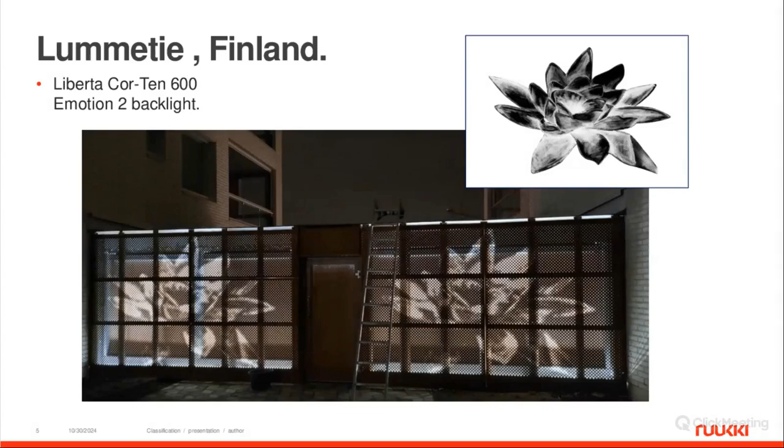This is an introduction of what types of perforation we use. The first, full perforation, means that we get already perforated material to our machines, and we can in general produce whatever product from it, but mostly it's used for design profiles. The material is perforated, so also all flanges and what you later have in joints, everything is perforated.

Then we have symmetrical perforation, and the idea is that you can choose whatever density pattern you want. No need for any drawings. You just need to indicate the size of hole, distance between holes, and what should be free edges. This type of perforation is produced on our production line during punching out the cassette blank shape from raw material.

And the last one, the most interesting one, for me at least, is art perforation, where we can take whatever image and create cladding from it. It can be not very big, 3 meters high, but it can be 30 meters high. The bigger the area is, the better the result.

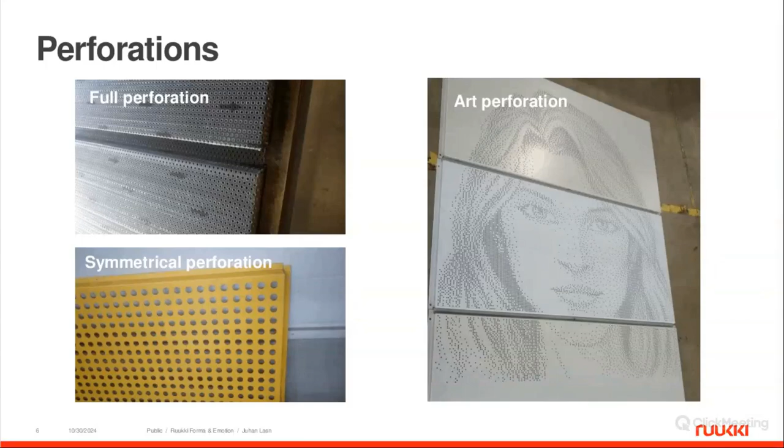Starting from full perforation, as said, it's used mostly for design profiles where we have 0.6 or 0.5 millimeter material, possible for all materials actually. We also do copper, stainless steel, zinc, etc. But the main idea is that this material is already perforated when it arrives at our factory, and perforation is done from coil to coil.

There is a table in the middle indicating which perforation patterns we are able to produce, but we also have a list of sub-suppliers that can make other density perforation with different size, shape, or position of holes, arrangement, either square or triangle arranged.

It's often asked: can you make very dense perforation? This question is usually related to projects where it's necessary to have airflow through the wall, like parking houses. We have tested that if we perforate material with 40% perforation, then make Ruukki design profile Rome S34 from it, we actually shrink the raw sheet some 25%. And as a result, when produced this way, we have 50% of airflow through this cladding product.

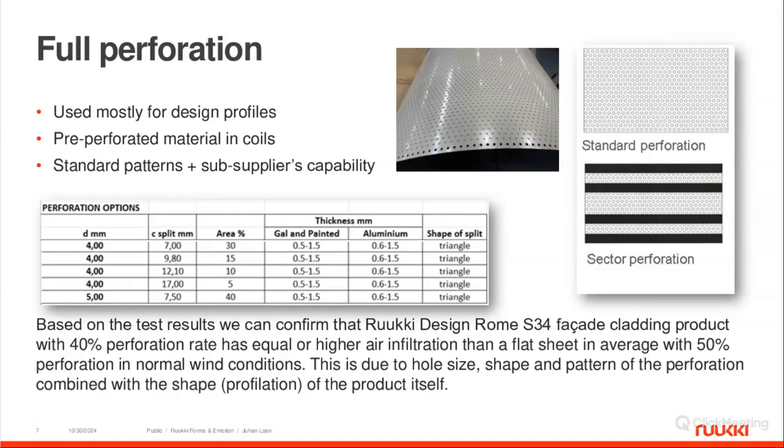Now, this is about symmetrical perforation. The table below shows that we need 30% free area, and on the second row we have different diameters. From this it becomes clearly visible how many holes we will have per square meter. With 50 millimeters we have 152, and with 6 millimeters we have more than 10,000.

And considering that every hole has some cost, it explains why production of high-density perforation is much more expensive than low density. Also, when perforation becomes very dense, the number of holes per square meter causes the material to warp. It's not straight anymore. During punching, it may get stuck in the machine. We have about 10 years of experience with it, so we can suggest: do not do this, but instead use another solution.

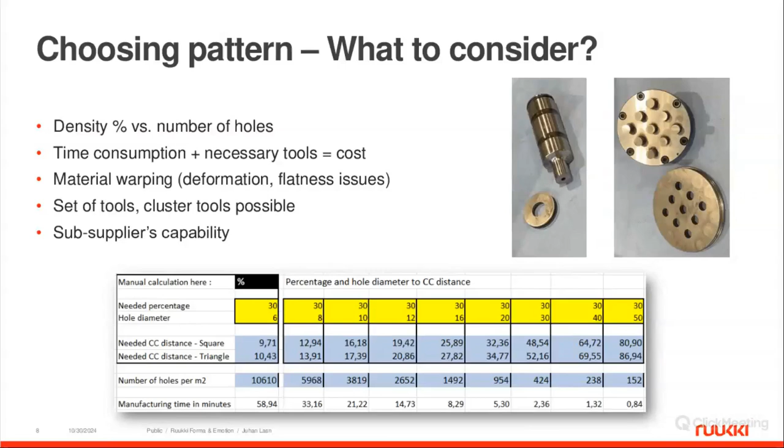Also related to this is that... this, I went too far.

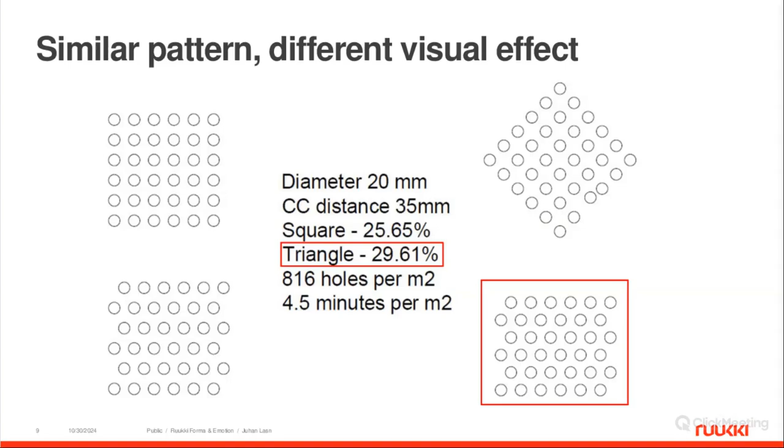We can achieve a different visual effect just by using the same pattern in a slightly modified way. On top left is what we call a square pattern. On top right it is rotated 45 degrees, and we have a different visual effect. On bottom left is a pattern we call shifted. Distance between rows and holes in rows are still the same, so cost is the same, but the visual effect is again different. On bottom right you see a triangle pattern; the density is a little higher, but the distance from each hole to each hole is exactly the same. It's shrunk a little from the original pattern.

What effect these different patterns cause is that if you rotate either the pattern on the panel or the panel behind the pattern, for example we want to install cassettes diagonally on cladding, you see that there is some loss of information. I'll turn my mouse to show you something. You see that here we only lose one row of holes.

We see it in the design phase, but if the architect cannot recognize it from the very beginning, it may look interesting to rotate this pattern, but what actually happens is we're going to lose more and more information as we rotate. There are some ways to make the situation better, but one must understand that it affects the final result.

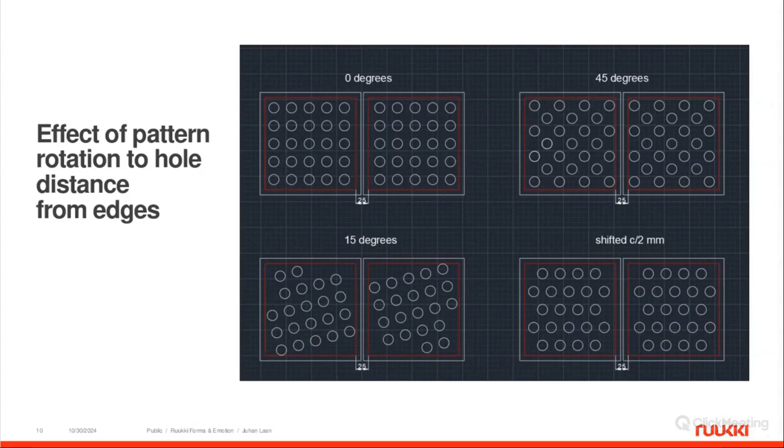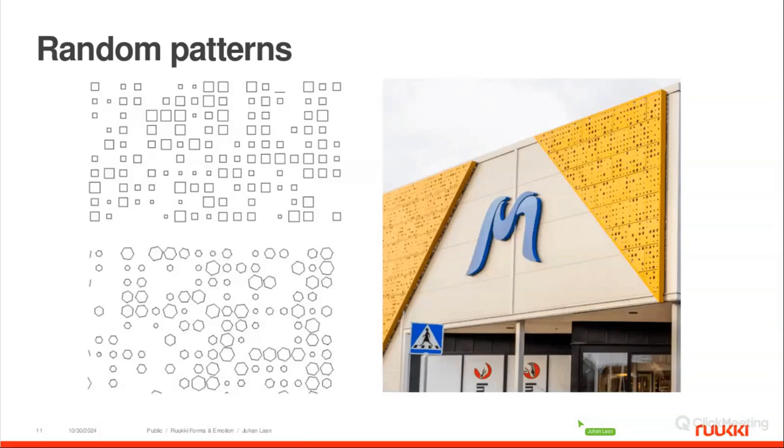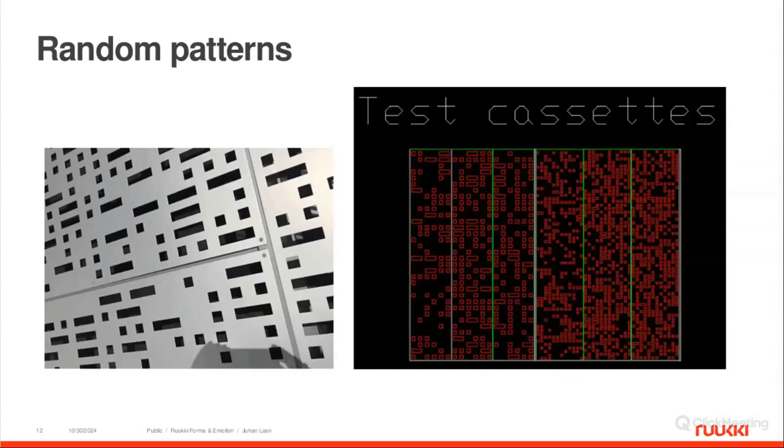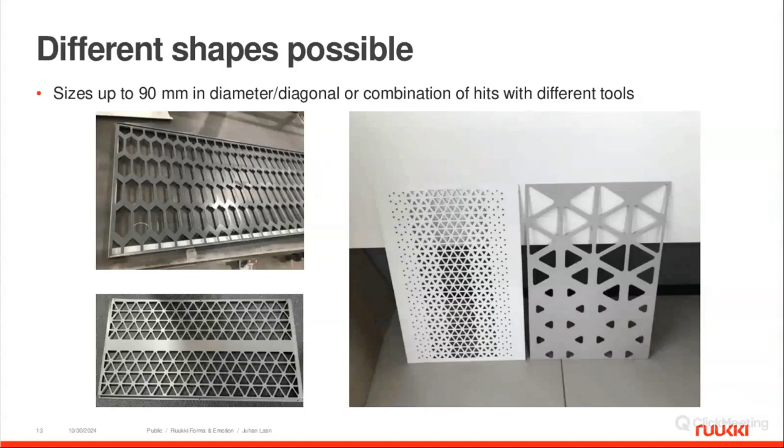On my next slide, we can also generate random patterns. We have tools for it. Holes can be square, round, triangular, or whatever shape. Here's an example from Sweden, also with different shapes of holes on the same cladding. And we can also do completely different hole shapes. If a project is big enough, we can order specific tools in specific shapes. But before we start the project, we can create sample products with our ordinary set of tools. It takes more time, but you can see what it means.

The last system of perforation is art perforation, where we take an image, whether it's artwork, a photo, or whatever, and create an AutoCAD file from it with predefined hole sizes and distances. Here is an example. We use two different modes to create this image. Dithering means we have one hole size, but either more or fewer holes. Halftoning means we have different diameters, with bigger holes in dark areas and smaller holes or no holes in light areas.

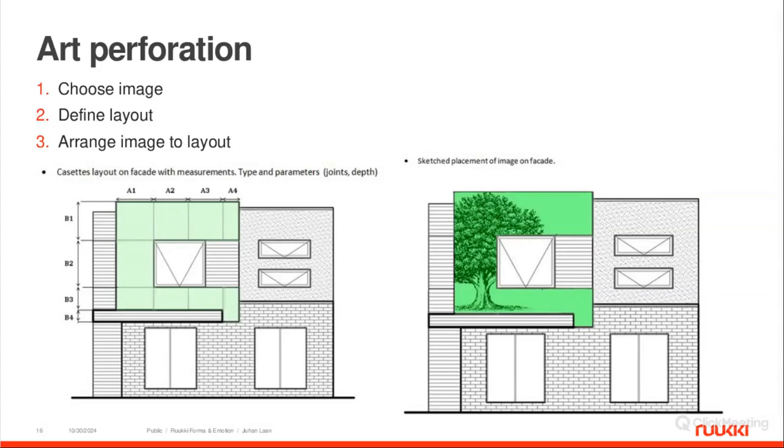To order art perforation, we first need to understand what our product is. We create a layout of the elevation, then put this image on it, and then you can send it to Pärnu, and we can proceed from this. You get numbered cassettes, which, if installed the right way, will show the result.

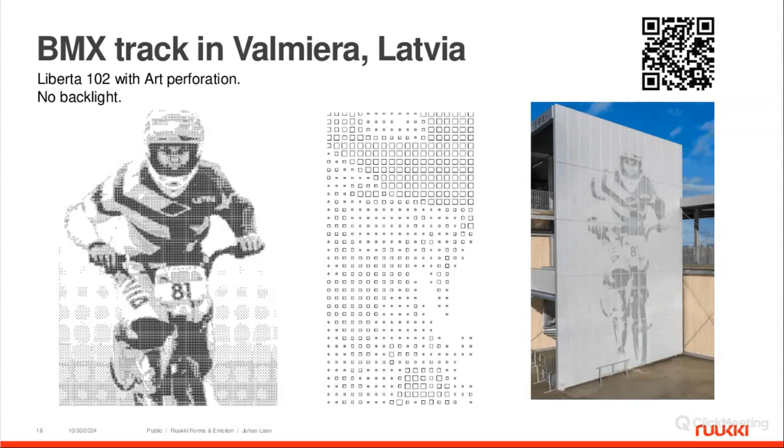Every time you see this barcode or QR code in my slides, you can take a photo of it and get access to Google Street View of the same location where it's done. It's in Latvia. Art perforation with square holes in Valmiera in Latvia. They have an Olympic champion in this discipline, and it was a nice project. What else? There is one more effect for art perforation: the square tool is turned 45 degrees, and the result is very airy.

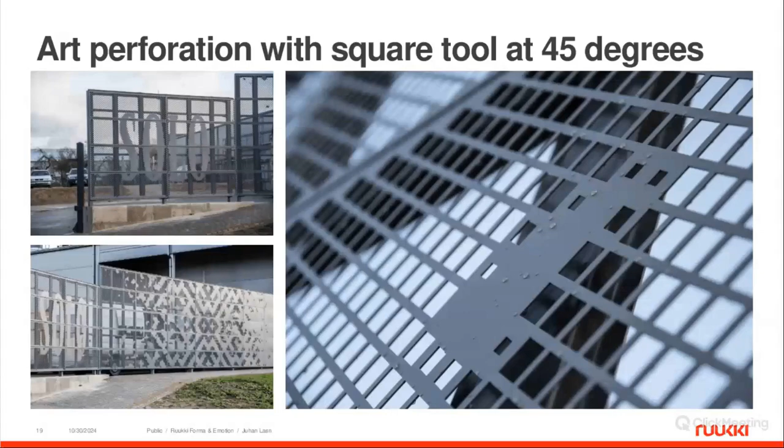We can also do art perforation with cluster tool. Then the pattern is all the same, and edges are filled with single punches. This example photo is from Canada, produced in Pärnu.

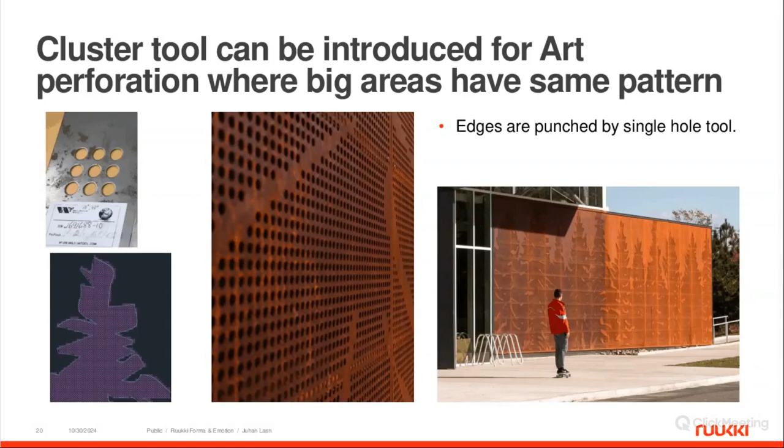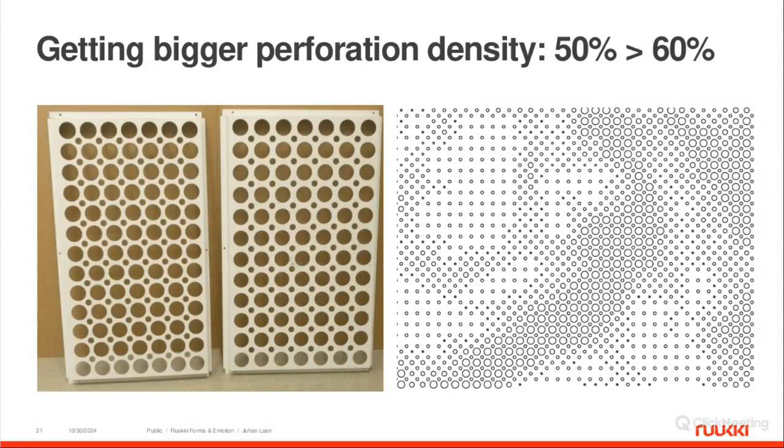If you want better perforation density, we can add another pattern inside of the other pattern, getting more density. There is one example of Tallinn airport, where actually also airflow is important, but perforation density is not, because it's virtually open area, actually, because of design of those lamellas.

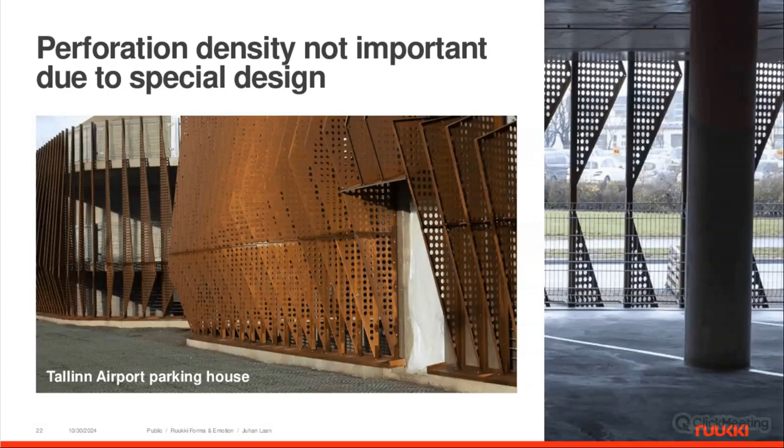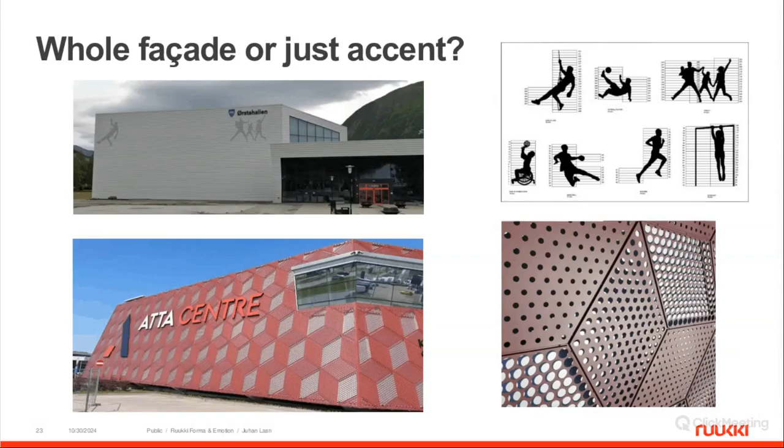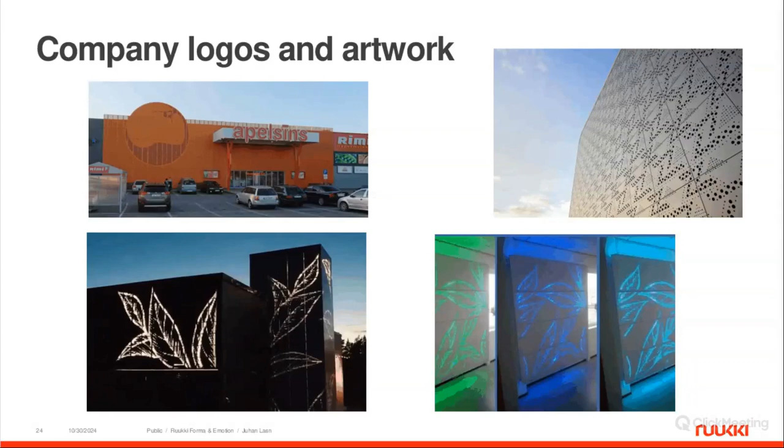So what we can do, we can either add some images to elevation, or we can make whole elevation as pattern. Company logos, artwork, you can see those closer when you get the presentation or record later. Illustration in Finland, very nice project.

If it's not doable by perforation, then we do it by laser cutting at our sub-suppliers. It cannot be done with Ruukki products, except for Corten steel. Laser destroys color painting, but it's possible with powder paint.

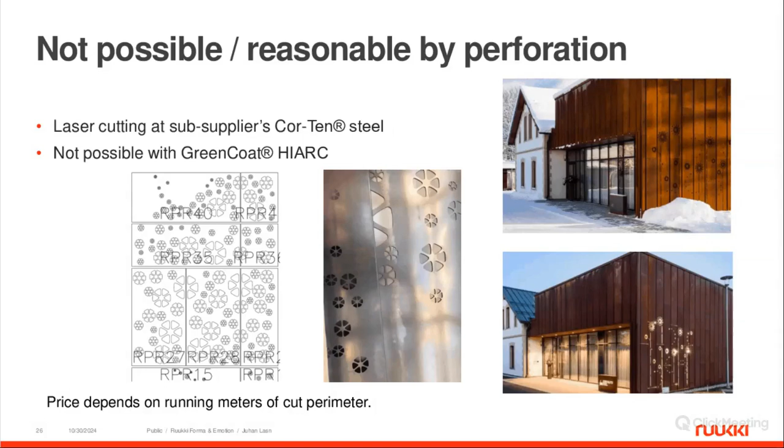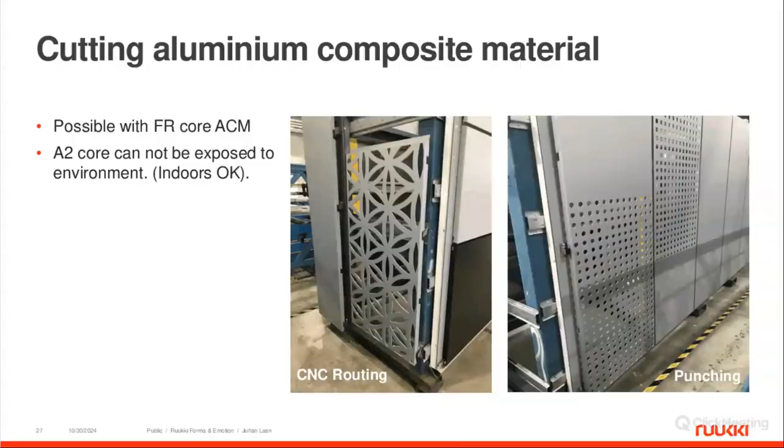And this is last about this subject. We can also do perforation in aluminum composite, whether it's punched or milled by router. Different shapes are easy to do. So, and now I proceed to lighting systems.

Here are two systems of Ruukki Emotion. Emotion 1 means that we have vertical aluminum studs, also carrying cassettes, and the LED light strip is built in the stud. We are always illuminating background, and you see illuminating background through perforated holes. We are not exposing lamps itself.

And the Emotion 2 system, here in this case, we have one lamp below of this, and with light background, it reflects well enough to have a perfect image.

So Ruukki Emotion first. When we are designing cladding with backlight, we first need to recognize how we are going to see it during daytime or nighttime. Do we have white material and dark background, or vice versa, and so on. And do we want colors or not? Not means that it's white.

To consider that we always need to have distance from the background, up to 130 millimeters is fine, and preferably light background, because light background reflects this light better. And this is in general design of this Emotion 1 stud. L profile will be connected to wall, and cladding cassettes will be installed on this wider part.

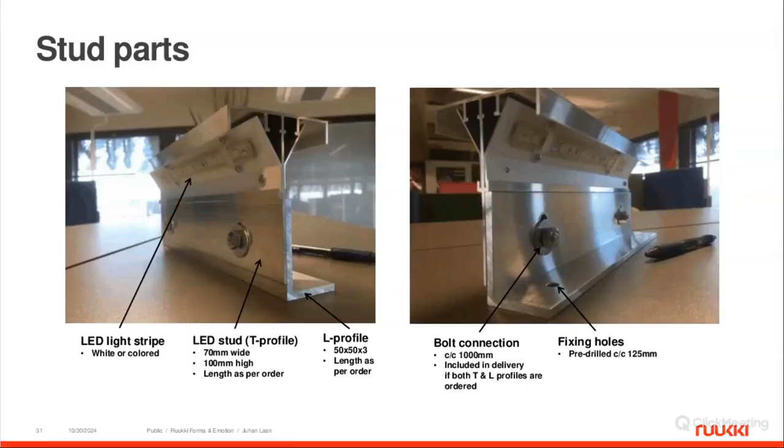There is one example of Emotion 1 installation in Sweden. So possible white with just turn on and off, or we can have dimmable, which means that we can change the brightness of light, or we can do RGB, which is fully controlled. You can fade from black to green to red, and so on.

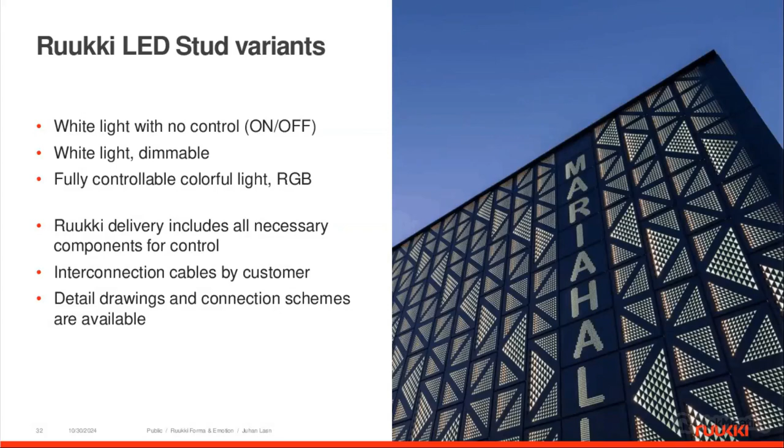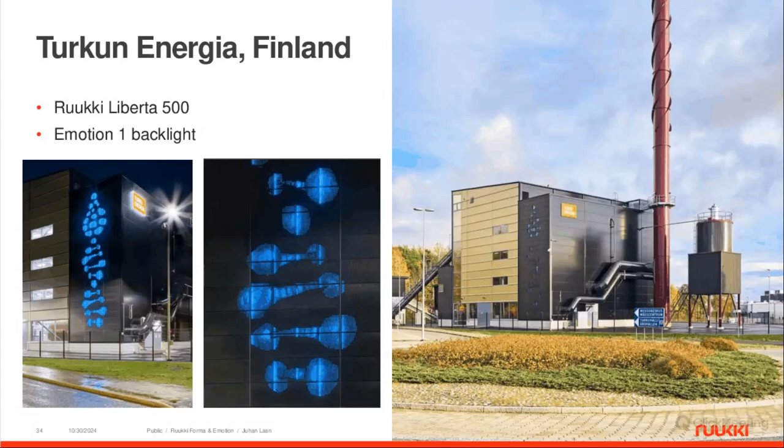Okay, and now the last part is Ruukki Emotion 2, which means that in this case we have lamps below the cladding, and lamps are powerful enough. I think in this case the elevation is some 8 to 9 meters high. Only one row of lamps is enough to illuminate the whole facade.

The idea of development of this Emotion 2 system was to make it easily maintainable, because with Emotion 1, if we have some issues, we need to open the whole facade. In this case, we have actually continuous channel for lights, very easy to make cabling, very easy to clean lamps or to change if something becomes necessary. And it's a little bit less expensive than Emotion 1 system.

There are few examples where you see this COOP logo on top. This is from project in Estonia where we have only lights on parapet area. The highest part of this cladding is 12 meters high, and still it's enough, only one 60-watt lamp on top to illuminate everything.

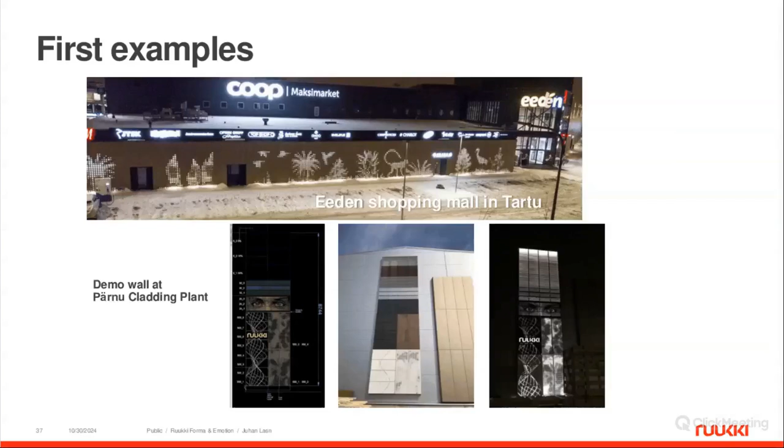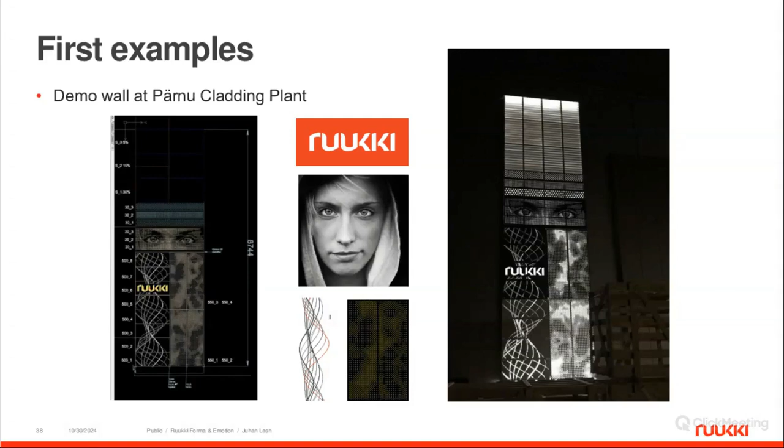This we have in our cladding plant wall outside in Pärnu. Everybody is welcome to visit Pärnu cladding factory. We have a showroom with our products and materials. We have this Emotion 2 demo wall, and we are preparing, hopefully during the next few weeks, also exposition of bigger cassettes and different products.

And these are components of Emotion 2. The idea is that it's a linear lamp. It has connection cable, it has fixing bracket, different options, and we are preparing to present also colorful version of it.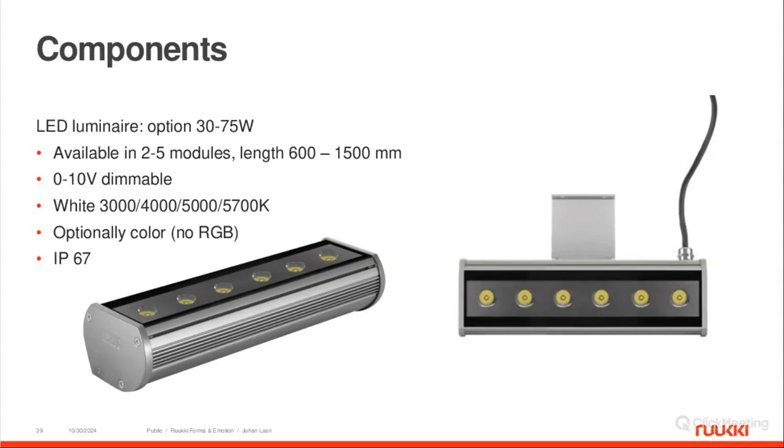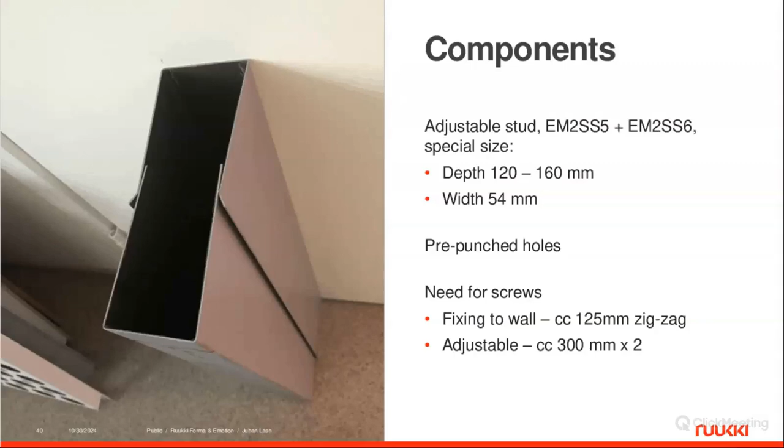Another important component of Emotion 2 system is the stud we are using to make the cladding vertically transparent. So we want to have as few shades as possible. We redesigned Ruukki's adjustable stud to make it deeper, to have necessary room for lamps, and to make it less wide to decrease shades. And this is not a standard product. You can adjust it from 120 to 160 millimeter depth.

These are also some photos from our test wall. You can see different colors and different products and different patterns on wall. So symmetrical patterns. On top there are design profiles perforated with some percentage, I don't remember exactly what. In the middle, those horizontal rows are cladding lamellas. The one with eyes is also lamellas, and then cassettes Liberta 500 on left side, or Liberta 550 on right side.

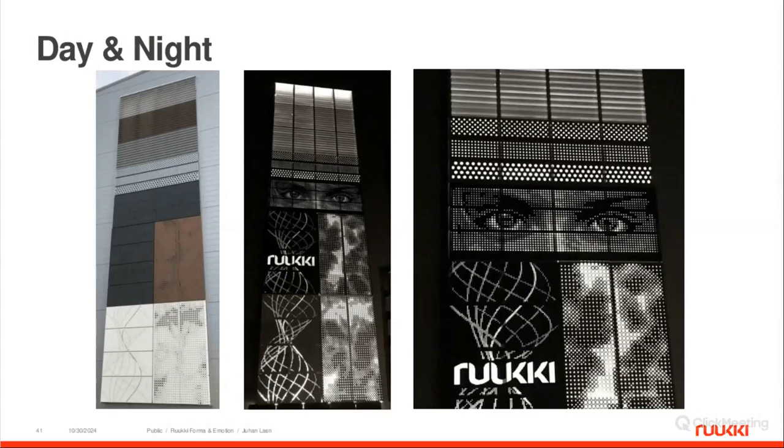And just for fun, we also added colors to see how different this may look. And I believe that was the last slide from me.

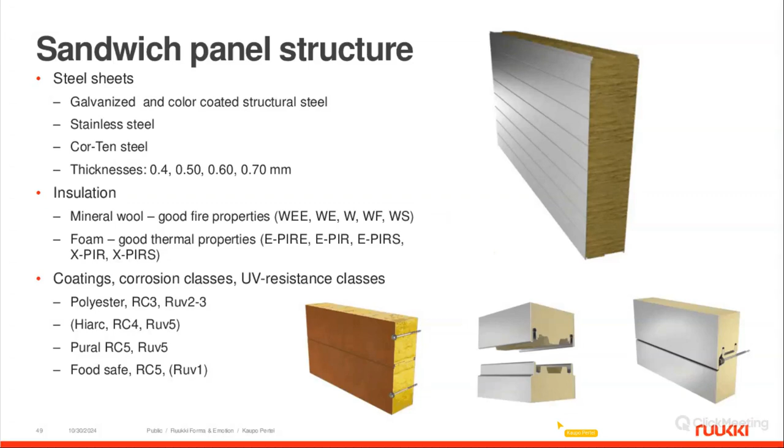Panels are really different. Just one little comparison: if you compare the same thickness panel, for example a 200 millimeter wool panel, both are our panels, but one of them is able to take a wind load of 1 kilonewton in a 6 meter span, which is like the average wind load in corner areas of smaller buildings, while the other panel with the same thickness is able to take 2 to 2.2 kilonewtons per square meter. It is a very big difference. The panels look the same, both 200 millimeters, both wool panels, but they are really different.

The bearing capacity is really different, and that's why it's important that if there is a plan to fix something to the panel, then first you always need to design the panel, and then think about fixing the cladding, because they are connected. It's not a good idea to look at them separately, because sometimes the cladding material gives separate demands to the substructure.

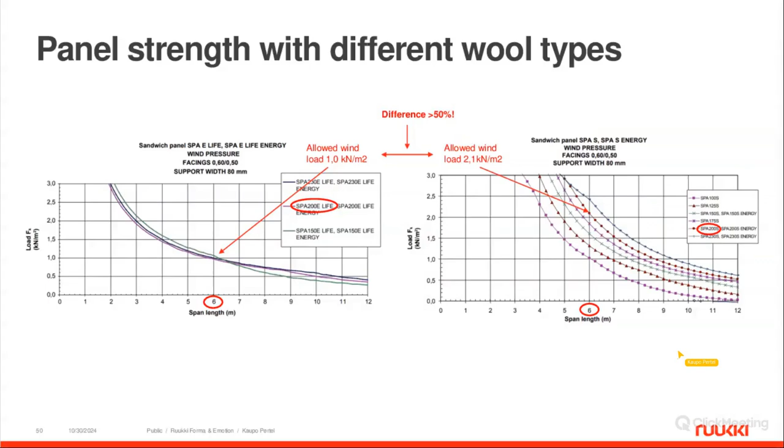And that is just like the comparison: if you compare those two different wall panels, one is made from the sandwich panel, one is made from the thermopurlins or steel purlins. They are basically different materials. The panel external sheet, like I said, is very thin. Thermopurlins are usually 1.2 or even 2 millimeters in some cases. And in the sandwich panel, like I said, deflections because of the temperature loads are very big.

The purlin wall is, I would say, very stable. You can easily calculate and set the maximum deflections. It's not the bending of the purlin. And if you want to increase the strength of the sandwich panel, if you fix something there, you basically increase the panel thickness. You can increase the sheet thickness on the panel, profiling type and insulation strength. But if you want to increase the strength of the thermopurlin wall, you basically play with the thicknesses of the purlins and distances between them.

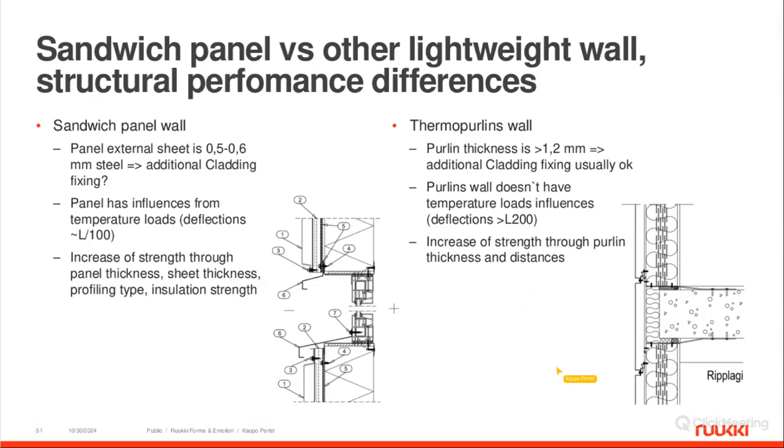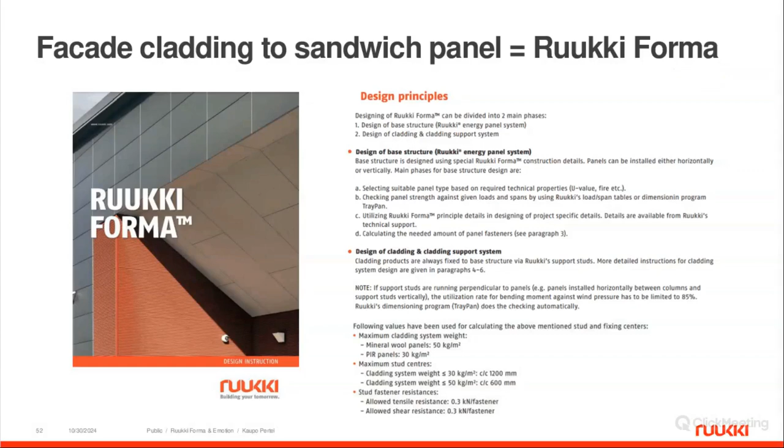They are different things. They both are metal-based external walls, but their behavior and design are really different. And that is the reason why we made this guidance and summary of the design instructions and called it Ruukki Forma, which really takes all those little details into account. If an architect or designer is planning to add something to the sandwich panel, this is very good guidance, and all the main things which need to be taken into account are nicely visible here.

And like I said, there are many important steps. One is to design the panel not only for the wind loads and other loads, but the cladding weight and deflections according to the cladding also need to be taken into account. And there are two separate calculations. If we calculate the panel grooves, then we have to add the weight of the cladding that will be added there, and if we calculate the fixing of the cladding itself, the purlins, then there are separate rules, and as you see, this is the limited amount of loads we allow if we fix some purlin to our panel external sheet.

The maximum tensile and shear resistances are 0.3 kilonewtons per one fastener. And this is also important to take into account. If those forces are in the same places, then you basically can use a summary capacity of 100%. It means that if tensile is used 50%, then you can't use shear resistance more than 50%. And that is also very important to take into account.

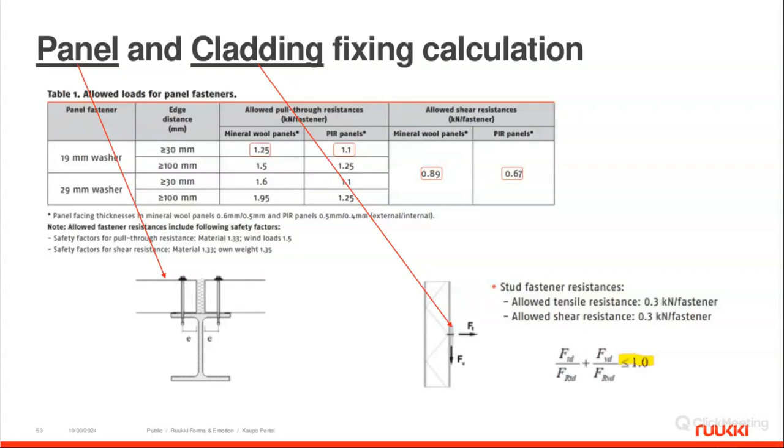Let's go further. The basic solution, how it works, is that we are making a purlin system on top of the sandwich panel. We fix those purlins, vertical or horizontal, relatively often to our thin external sandwich panel steel, and to this purlin we fix our cladding materials, and that's a much stronger support for the external cladding. And when you fix the cladding itself, you can use the normal fixing elements that are standard for the cladding materials, no need to think about it another way.

It's also visible that, for example, with our Liberta cassettes, if you use cassettes longer than 3 meters, then you have to limit the movement of the sandwich panel in a very strict way. That's span divided by 400. That is just an example that it's not allowed to use these 6 centimeter deflections.

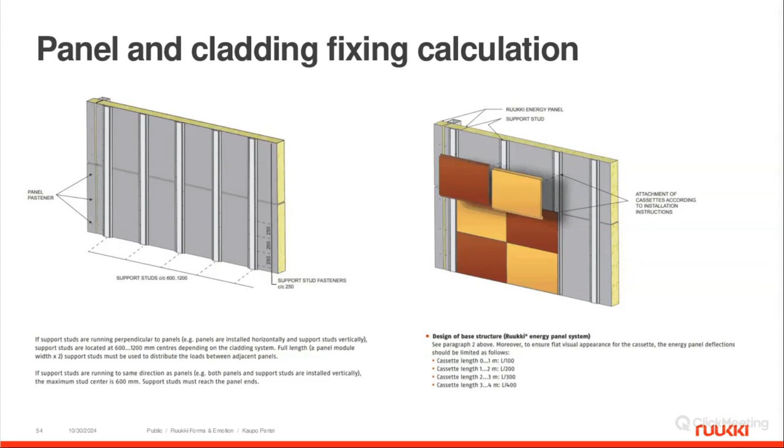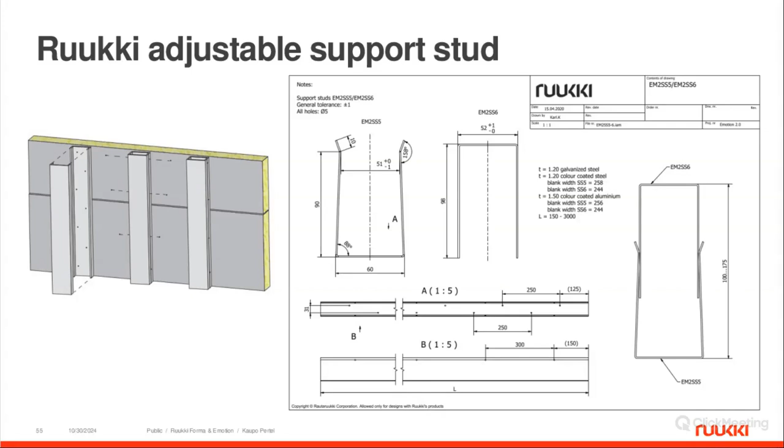Shortly, Juhan also showed our adjustable stud, which is good to use if the external cladding needs to be moved further away from the sandwich panel or substructure. It's possible to do it up to 175 millimeters, and then the lights play in a better way under our cladding.

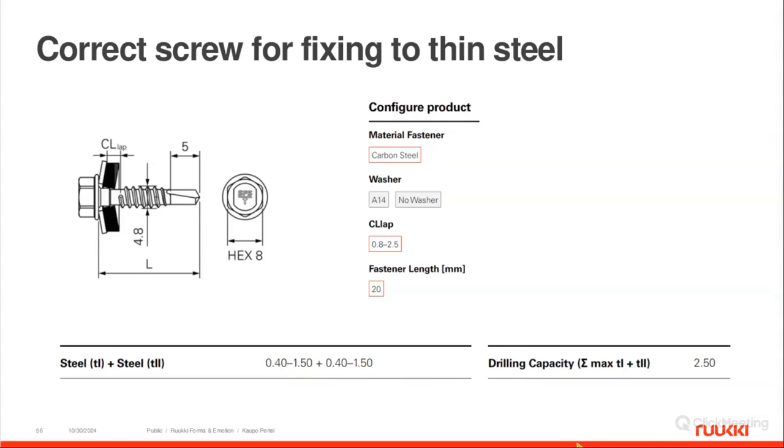And the crucial thing is, if we fix something to our sandwich panel, the screw type is very important, or whether it's a screw, a rivet, or whatever type of element. About screws, we're all used to talking about the maximum drillability, that this screw drills 2 millimeters or even 10 and 15 millimeters. But in thin steels the minimum drillability is most important, and it should be written in the screw documents that this screw is allowed in, for example, 0.4 millimeter thickness steel. If you take the loading data of the screw, which is usually in this document, and you see that there isn't 0.5 or 0.6 thickness, then you basically can't use those screws in that place.

And that's why you have to make separate tests on the site, and it's a totally different topic then, because you have to choose according to the minimum drillability, not the maximum. And as you see there, that is also a big difference, that you can't rely only on the screw supplier data, because as you see, the screw supplier allows using 0.6, 0.97 kilonewtons per one screw, but we limited it with 0.3. And this is because of the panel, not because of the steel, because the connection between the steel sheet and insulation will be broken before the screw will be out from the steel.

And that is also very important not to go over that. And every panel supplier should give that limitation for their panel also, because they are really different. I saw we have 0.3 kilonewtons, some suppliers have 0.2, which means 50% more screws are needed than we are declaring, and etc.

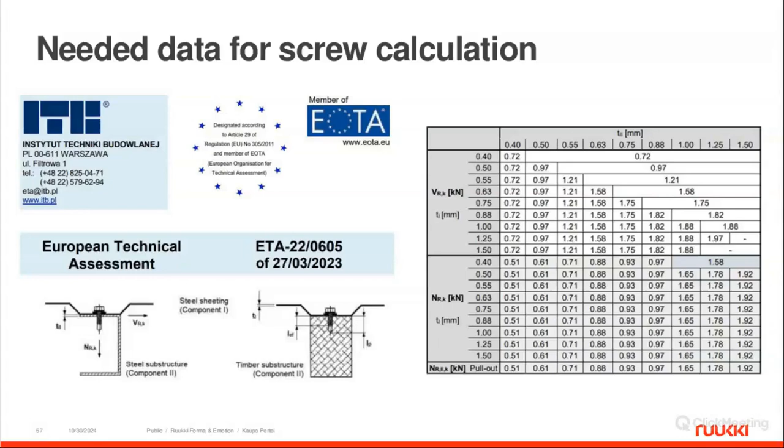Okay, and yeah, that was shortly about our Ruukki Forma. Like I said, it's not just a bunch of materials. This is a full solution, carefully thought through and designed and supplied together. That is Ruukki Forma. Thank you.

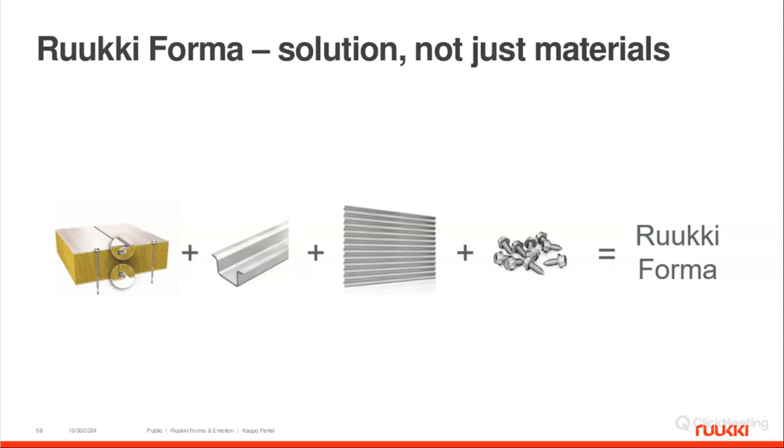And I give the word now to Karl. Karl is then showing those end results and references, how this Forma with non-visible substructure really looks. Thank you. Thank you, Kaupo.

Okay, let's move on to my part, starting with a small introduction. So yeah, my name is Karl Koppel. I'm the Baltic Design Engineering Manager, situated in Estonia, actually sitting in our cladding factory. I've been in Ruukki for 6 years, and started my career here as a cladding product engineer. So I have done quite a lot of different cladding solutions, and also a few standard products. For example, our Primo Skyline series is the one that I have helped to develop. And from an education point of view, I have a master's degree in product development and production engineering.

Good, but yeah, moving on. Let's take a look at some of our examples. First up, we have a Ruukki Forma example from Lithuania. This is one of the latest projects that we have finished. It's not our official reference on our web pages yet, but just as a sneak peek, I can show it to you. So basically, there we delivered Ruukki sandwich panels, around 2,000 square meters, with micro profiling in 2 tones, RAL 7016, also known as anthracite gray, and 9006 or silver.

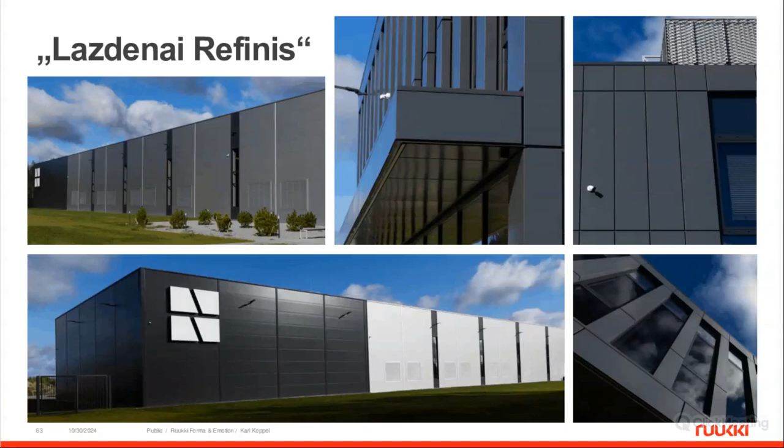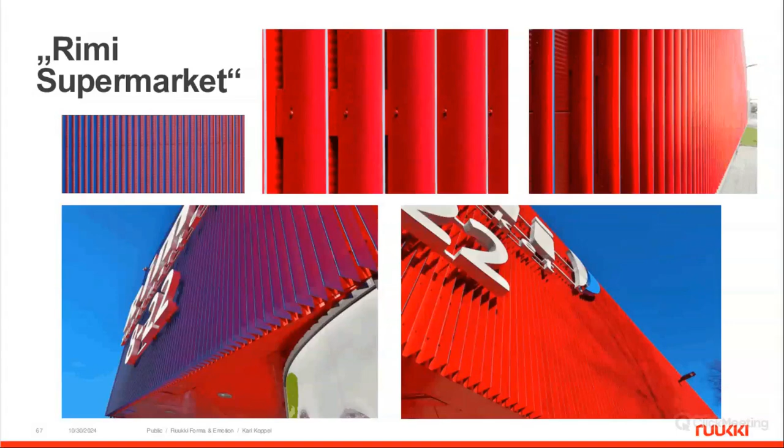So a really nice effect: it's a V-shaped lamella with one side painted red, another side painted blue, and it gives this really nice chameleon look, so as you drive by, the color changes. But yeah, a rather simple product to put on our sandwich panels.

Next up, we have another Ruukki Emotion example, this time from Finland. This you could also see in the introduction video. It's actually a big server or data center somewhere in Finland called Lumi. It's also a reference on our webpage, and there we delivered a Ruukki Primo, which is our aluminum composite or ACM product line, a bespoke solution.

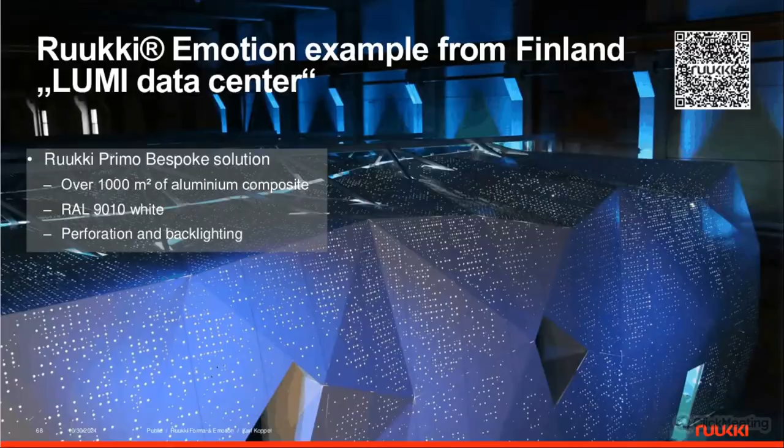So over 1,000 square meters of ACM in RAL 9010, which is white, and in addition, perforation and backlighting was also used in that case. As you might see from these close-ups, there's art perforation and special shapes and backlighting, and this data center also doubles as a seminar room, as you can tell from the chairs here.

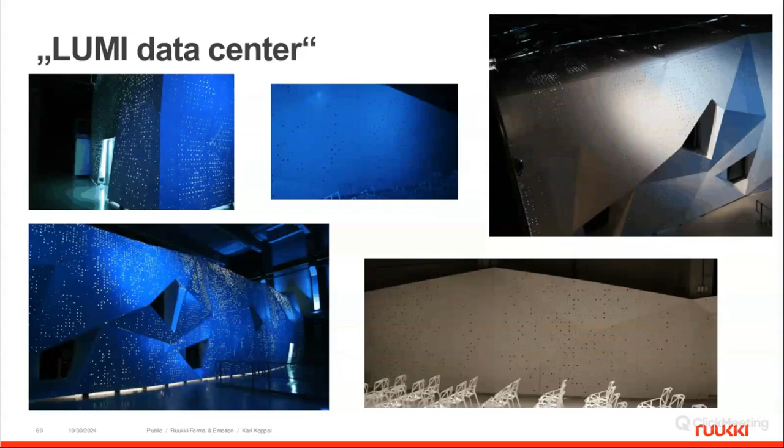And some close-ups of it are right here. So also a good comparison of how it looks during the day and in the evening when the sun starts to go down. So really nice effect. And once again, this random pattern art perforation was used here. And also some windows were covered up with this cladding, giving a really nice effect inside the building and also acting as a sunshade.